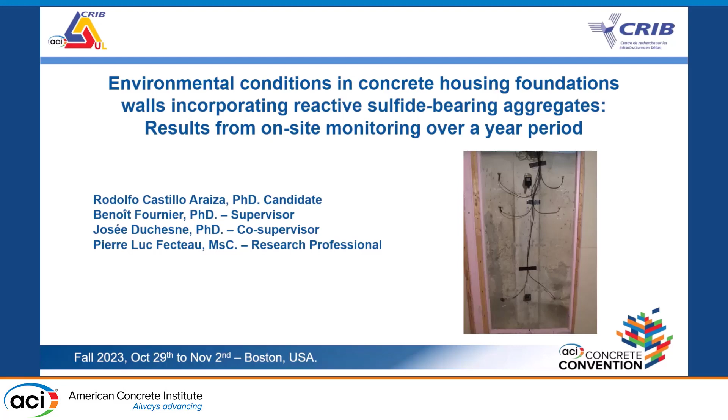Today, my presentation will present another part of the project, trying to understand the issue with sulfide-bearing aggregates. I'm Rodolfo Castillo-Araiza, a PhD candidate at University Laval, under the supervision of Professor Benoit Fournier and Josée Duchesne, and working in collaboration with Pierre-Luc Fecteau, a research professional in our group.

To give you some background on where we are working: it's a particular case in the city of Trois-Rivieres in Quebec province, Canada, where some sulfide-bearing aggregates were used to make concrete elements for commercial and residential buildings.

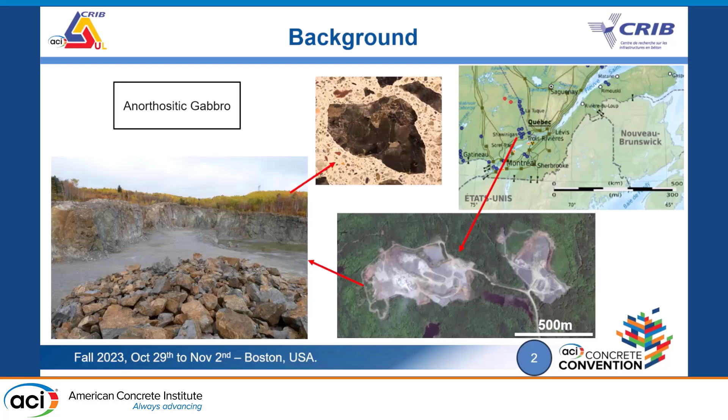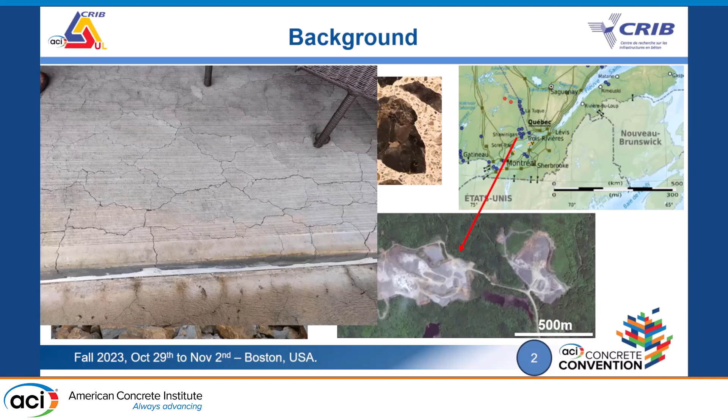These particular aggregates, as you can see in the picture, contain a large quantity of iron sulfide minerals that, with time, water, and oxygen, will react and generate a lot of cracking and deterioration of the concrete. The owners have had to lift off their houses, demolish the concrete wall foundations, and reconstruct them again. It was a very big problem in the city, and it's still a big problem today.

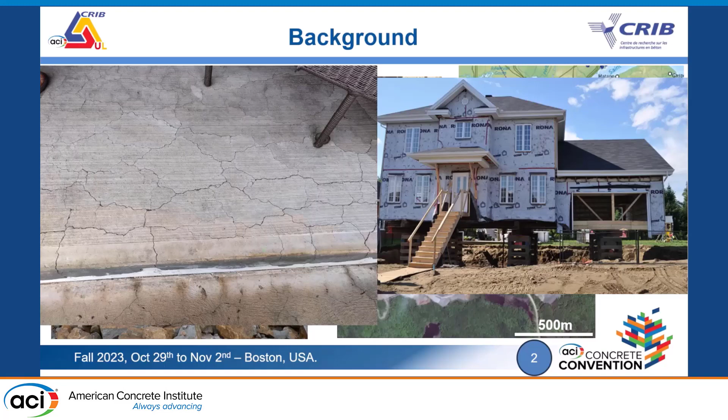In my research program, we have different objectives, and one of these was trying to understand how environmental conditions will affect the kinetics of the reaction in the concrete walls.

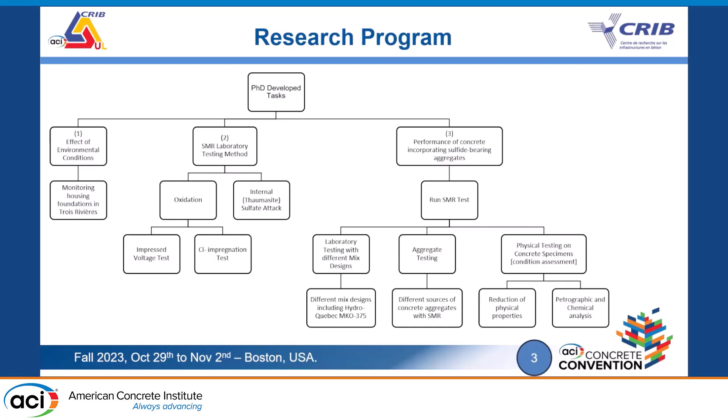That's what I'm going to present today, but I want to mention that part of my research was also developing a concrete test. We have already published a methodology, an accelerated method, to evaluate the potential of the oxidation reaction of sulfide-bearing aggregates.

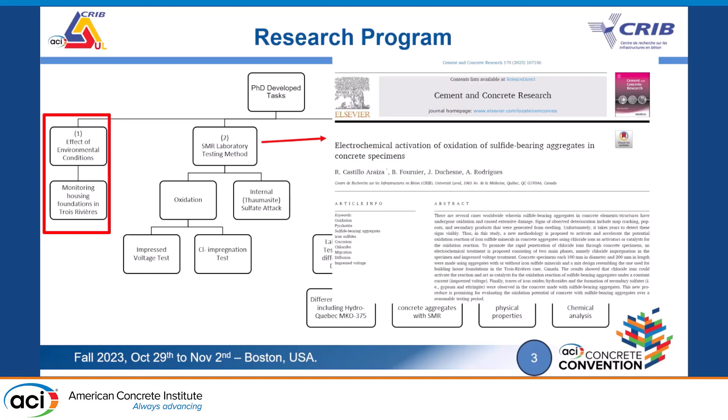There are more papers in progress dealing with different reactive materials and how the concrete properties will be affected due to this reaction.

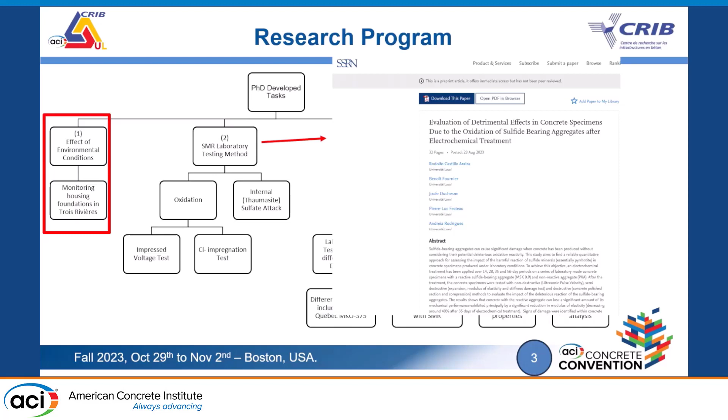The objective of the first step of the project was to understand the environmental conditions that will affect this harmful reaction. So we analyzed the temperature, humidity, and oxygen level in potential concrete walls with these types of aggregates, in collaboration with the National Research Council of Canada.

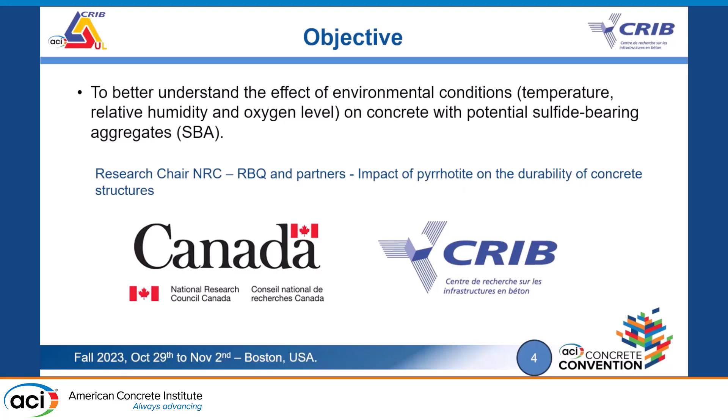For that, we installed some sensors—temperature and humidity sensors, oxygen sensors—and a data logger where we could keep this data over a one-year period.

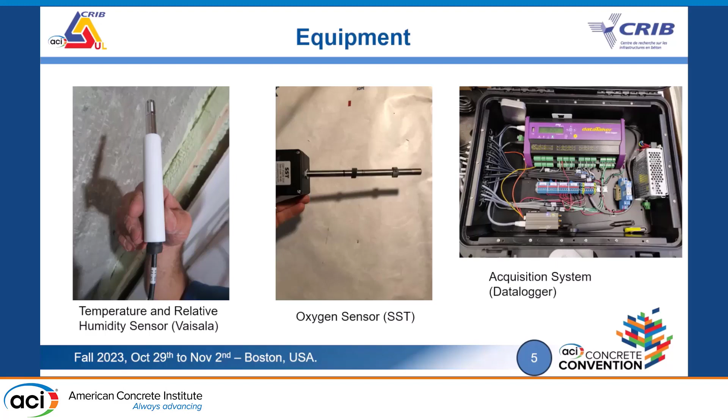How was the installation done? We used 3 different heights in the concrete wall. It was important to see the concrete exposed to the environment, but also how the concrete would be affected if it's underground or below ground level.

We installed 6 sensors for temperature and humidity and 2 sensors for oxygen levels.

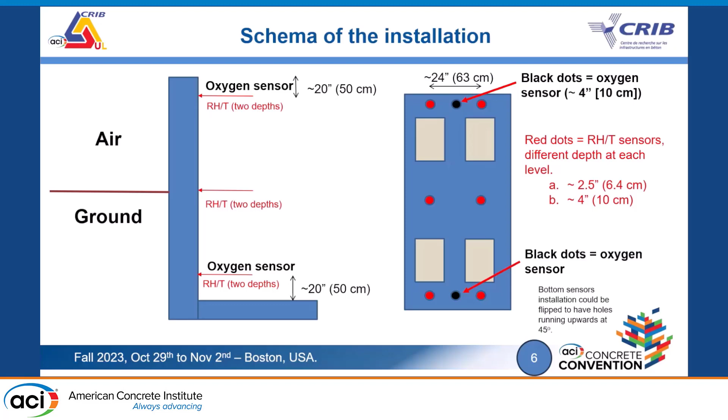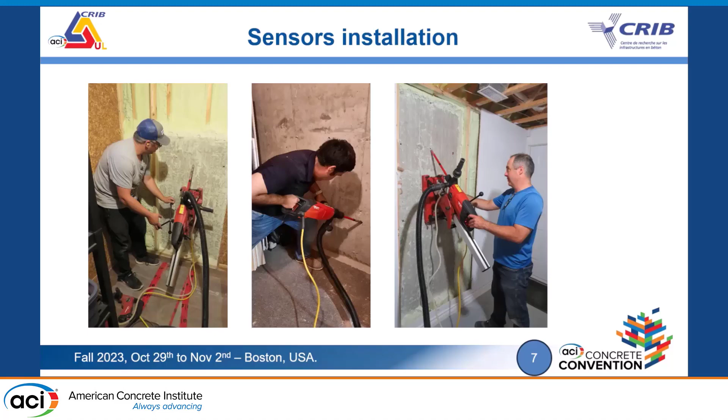We went to some owners of concrete with this issue, who gave us the opportunity to carry out the study in the city of Trois-Rivieres.

For the installation of the sensors, it's really important to note that we measured at 2 depths: one at the center of the concrete wall thickness, and another near the surface. We protected the sensors with a PVC tube to avoid interaction with room conditions.

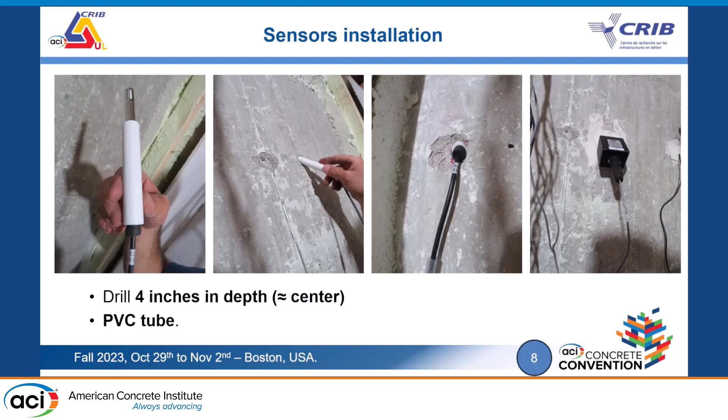We applied a sealing with fast-drying epoxy, and every sensor was identified. The acquisition system was strategically placed in a room to avoid contact with water, humidity, or children who might play with the system.

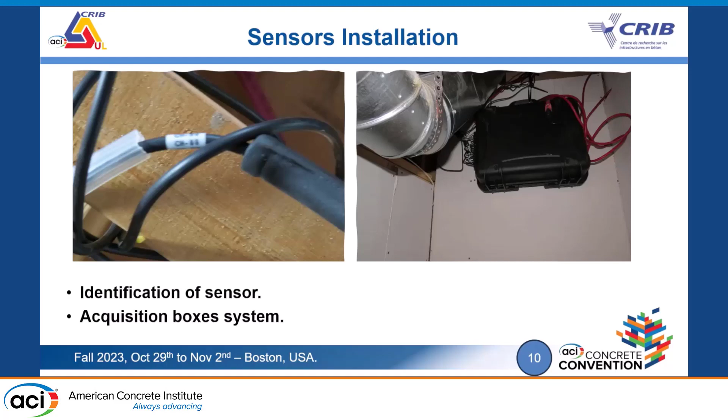The first case is a house that we analyzed for 69 weeks. One condition in this wall was that not all of the concrete wall was exposed to the environment, so we had the opportunity to install 2 sensors in the room to see those conditions as well.

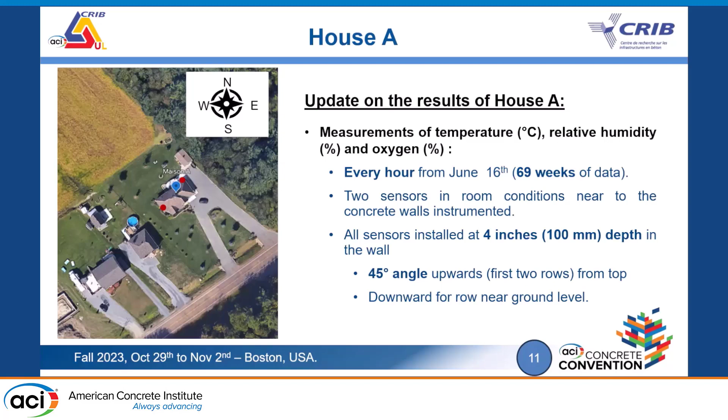All installations were at a 45-degree angle to avoid water getting inside. We tried to eliminate all risks that could damage the sensors and affect the data quality.

For the first wall, we installed at 3 heights. The importance of this wall is that one side is exposed to environmental conditions while the other side is exposed to the normal room temperature of the house.

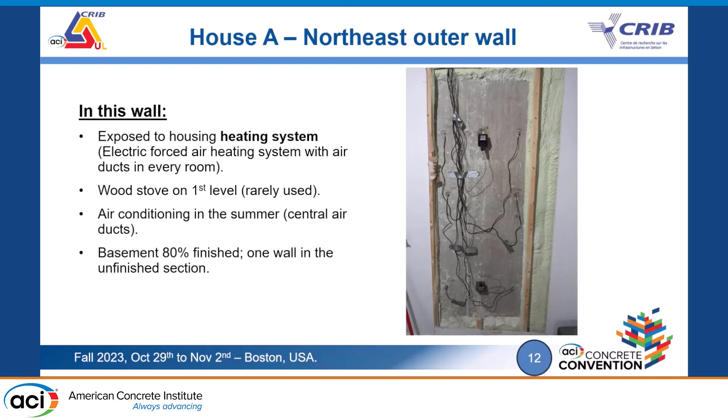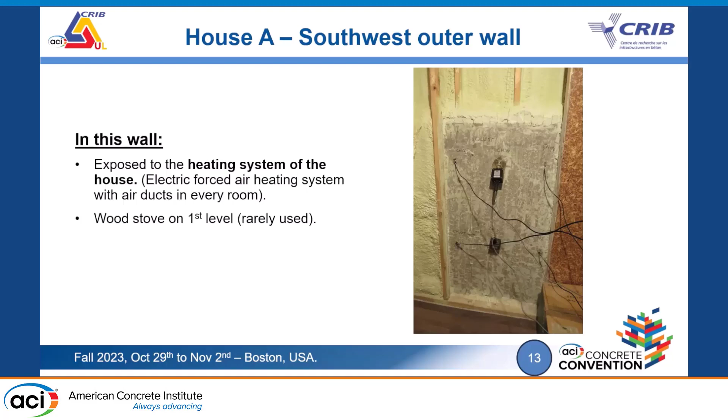For this wall, we could only install 2 lines; we couldn't reach to install the other, but it's exposed to the heating system of the house. The 2 sensors I mentioned were installed close to the wall inside the house.

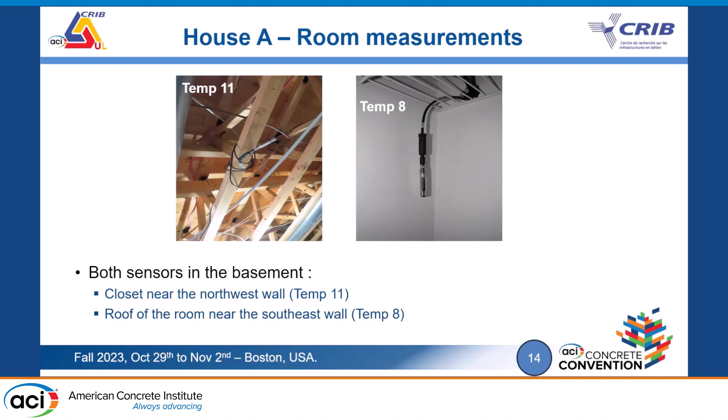The results are really interesting because we can clearly see that when the concrete is exposed to environmental conditions, we observe significant temperature changes. In the room, because of the heating system, the temperature mainly stays the same.

Here, when we turn off the heating system after the big winter in Quebec, the temperature decreases a little, but then returns to the higher level.

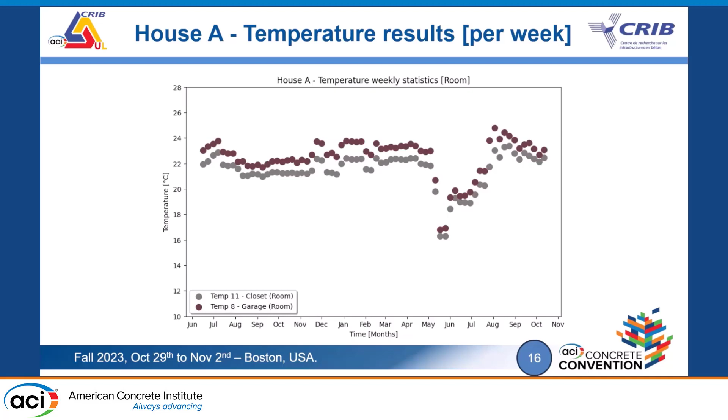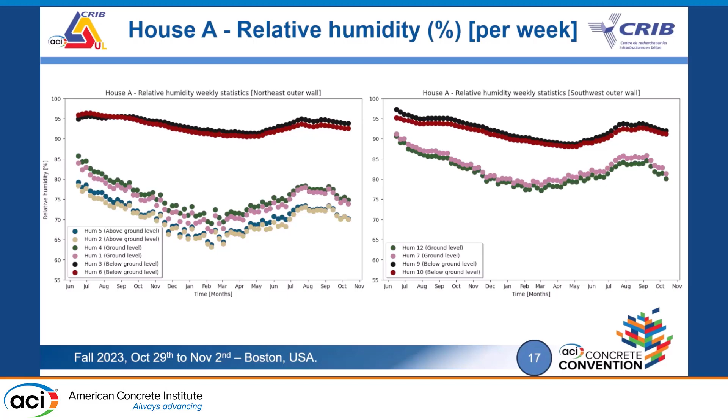But the most important result was with the relative humidity. You can see two really important things: first, the 2 sensors protected below ground level maintained high relative humidity, while the other levels, affected by outside and inside building conditions, really decreased and became quite dry, almost reaching 65% relative humidity at 4 inches into the concrete wall.

This is also affected by room conditions, because in winter, due to the heating system in the houses, relative humidity really decreases inside, and this may affect the internal condition of the concrete wall.

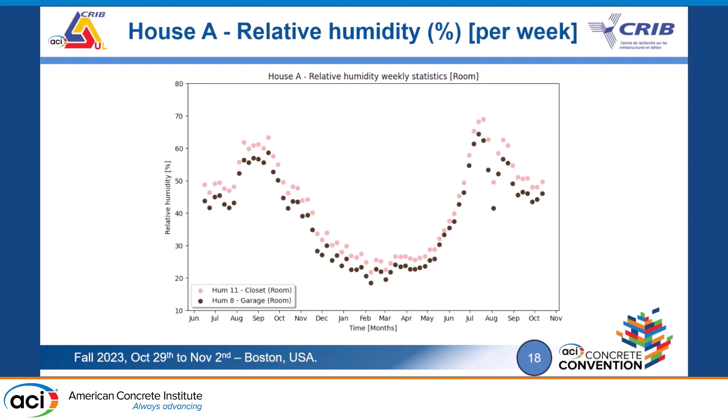In terms of the oxygen level, only one sensor was capable of detecting oxygen consumption related to the reactivity of the iron sulfide minerals. But unfortunately...

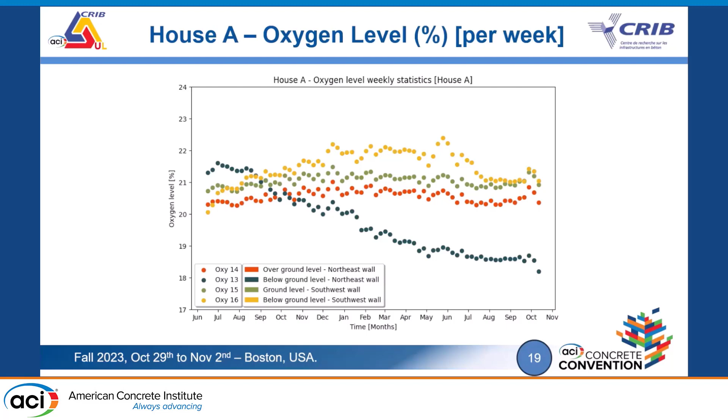All the concrete walls that we analyzed, only this one showed a decrease in the oxygen level, about 3%. So we believe that maybe some iron sulfide minerals were exposed near the sensor and could detect the oxidation of the minerals.

In conclusion, as I said, we see that the temperature is affected inside and outside, but the most affected measurement was the relative humidity. We also see an isolation effect from the soil, but even so some sensors can reach until 60%. And as I said, the only sensor that showed a decrease in oxygen level was sensor number 13.

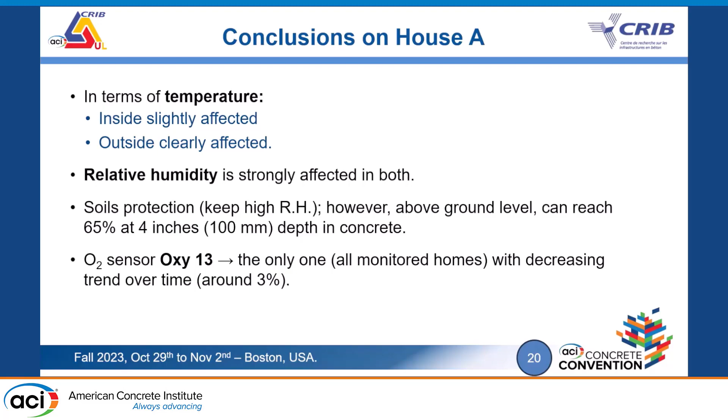Another case is another house, really important, these results. Unfortunately, in this house we could only measure for 52 weeks because the owner decided to demolish it due to the level of damage it had.

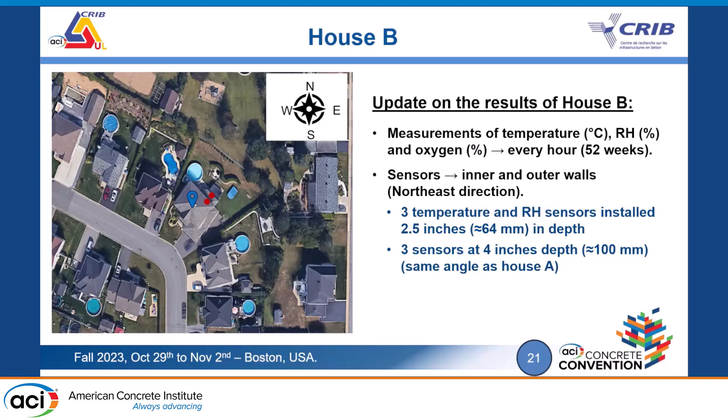But the important thing in this house is that we can analyze an inner wall in the house, and the results are really interesting.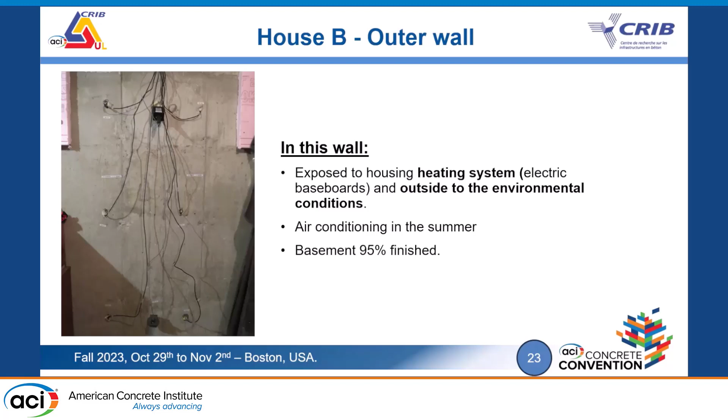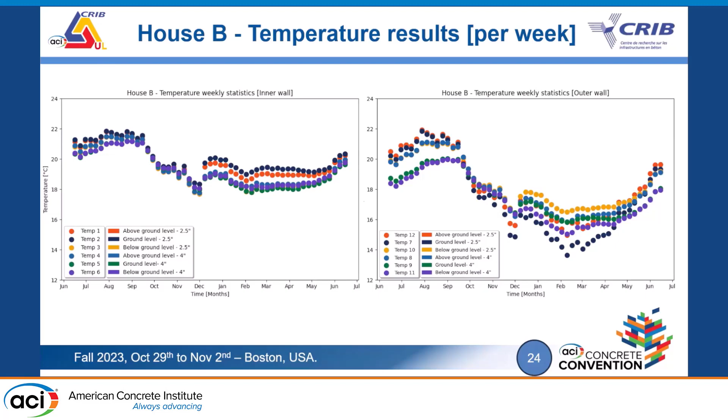This one was also exposed to the heating system, and for the outer wall it was the same condition, outside and inside, but the inner wall only has the inside condition of the house. The results are really important because there's not a lot of variation in temperature for the inner wall, but we see cycling of temperature in the outer wall. The most impacting result is relative humidity.

We can see that the inner wall has around 50 to 40% relative humidity due to the heating system in the house, the drying condition, but the exposed wall had higher relative humidity.

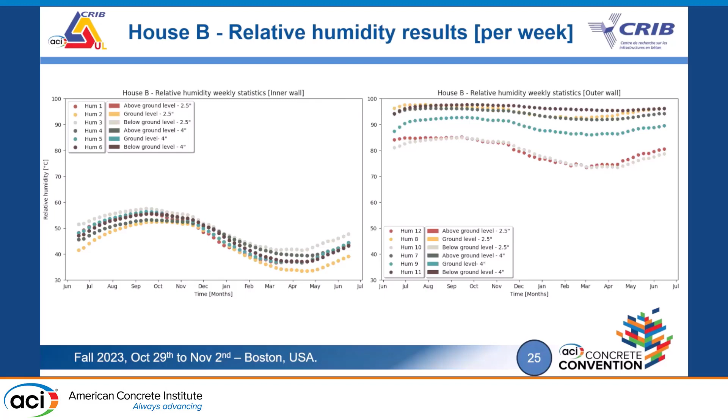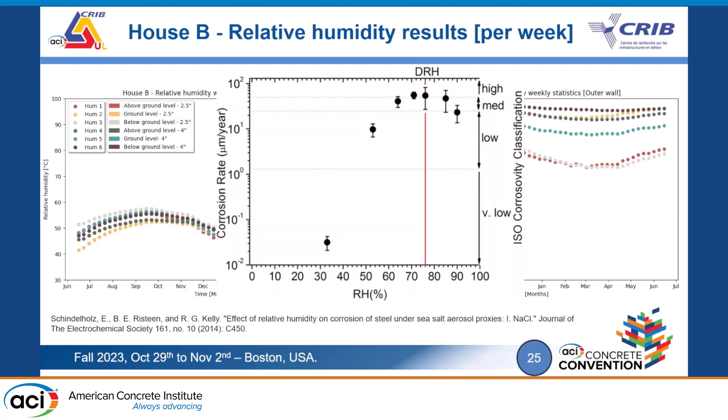This is really important when we talk about corrosion rates, because we know that with higher relative humidity there is a higher probability of generating corrosion or oxidation. But when we decrease the relative humidity, we also decrease the probability of corrosion. I'm not saying we stop it, but we decrease the possibility that it happens.

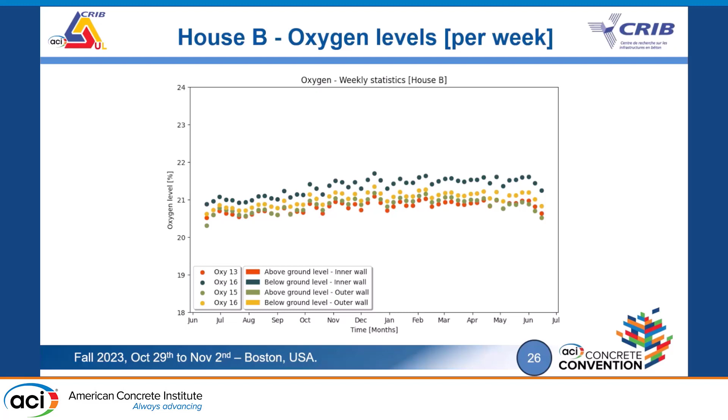Just to show the last result on this house, it's important that there are no changes in the oxygen sensor levels, so unfortunately only one sensor showed something in these results. Most importantly, in this house we can see all the signs of damage due to the oxidation reaction of sulfide-bearing aggregate, and until today no inner concrete element has been reported with damage.

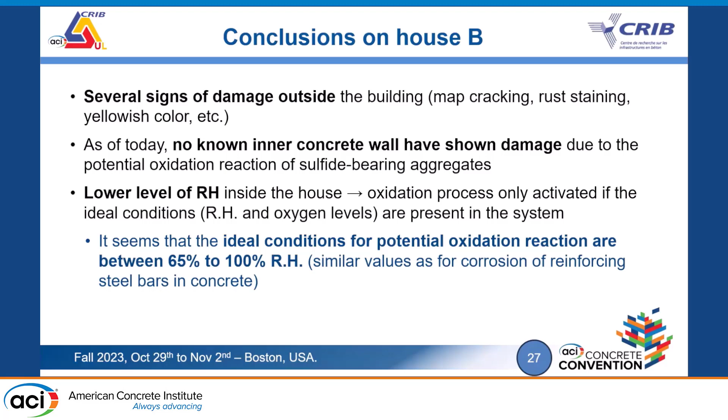I mean, elements that have not been exposed to environmental conditions. So we think that the lower levels of relative humidity may play a big role in the reaction, or the kinetics of the reaction. We think that between 65 to 100% is the ideal condition for this reaction to happen.

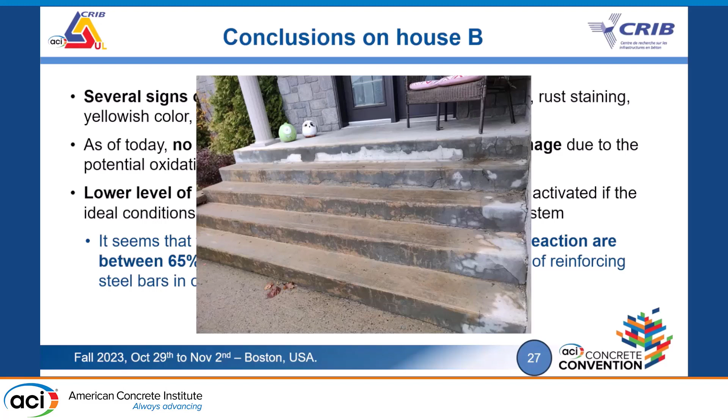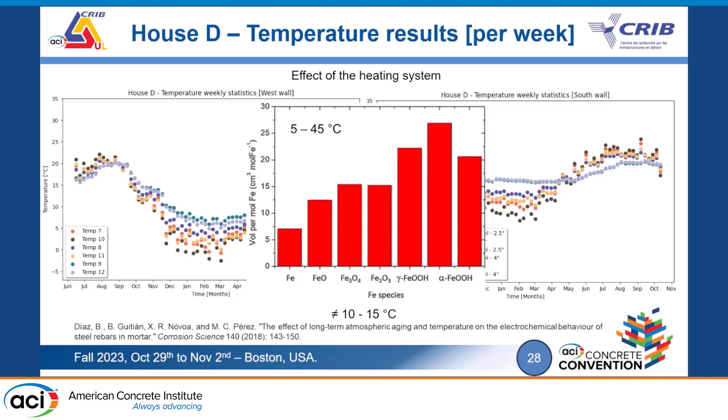This plays a very big role in the kinetics, because different oxygen and hydroxide oxides will form depending on the temperature in the concrete, so it can change the kinetics of the reaction.

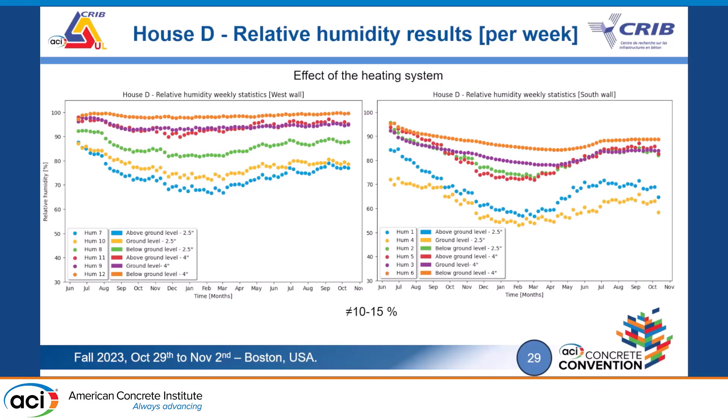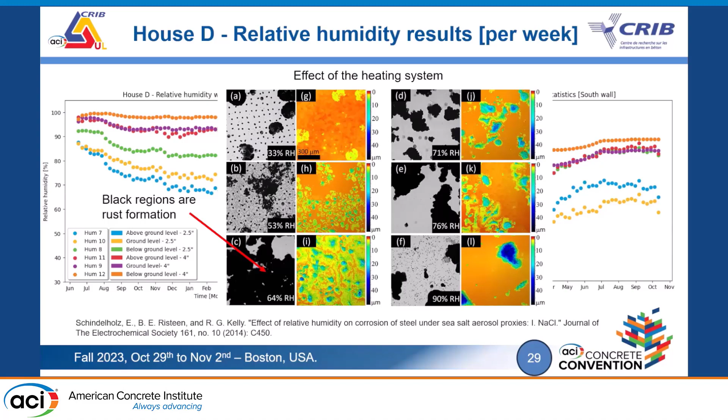Relative humidity plays a big role in how the oxygen and hydroxyl rust products form, and we can see that when we are close to 65%, we generate more oxidation than when we have low or high relative humidity. It's still forming, but less strongly.

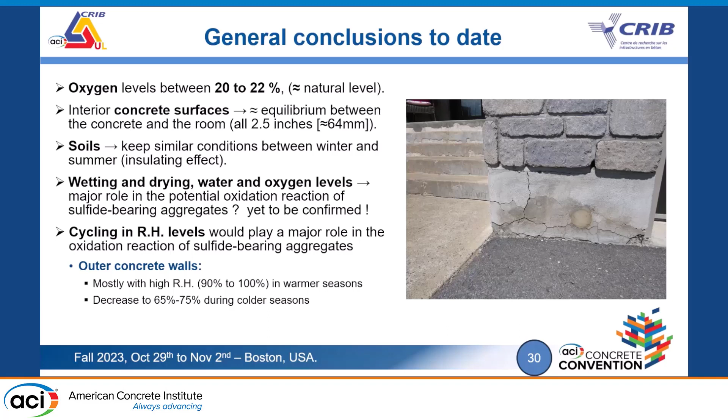We think this cycling of low and high relative humidity in summer and winter conditions may play a big role in the kinetics of the reaction, and whether the concrete will be affected over time. Just to note, during summer we have high humidity, and in winter we have low relative humidity.